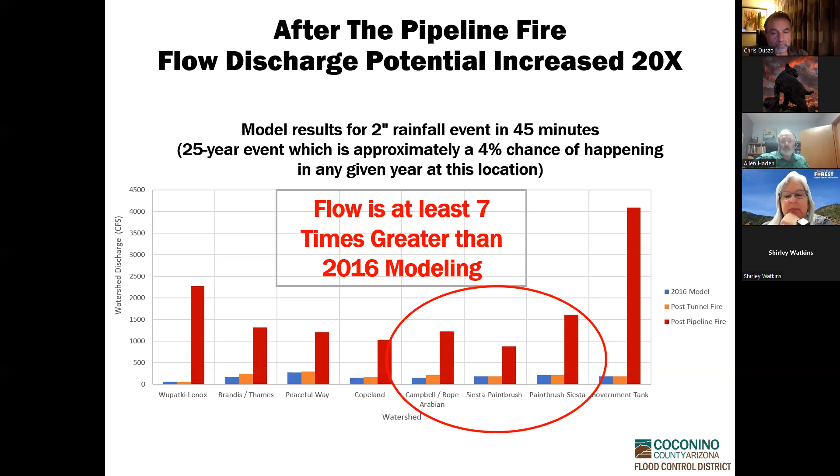So the district undertook to produce, we set a goal early on to produce 1 million sandbags, and we did reach that goal. Fortunately, we have a stockpile in place for next year now.

We placed over 4 miles of concrete barrier. The engineers worked around the clock preparing the mitigation exhibits, and the fires had actually damaged a number of the measures on forest, which had to be repaired and prepared for the flooding. A number of other things were done to clear out channels and those types of things.

We did secure some funding through NRCS Emergency Watershed Protection Exigency, which means emergency funding, specifically for barriers and sandbags. We've probably spent in excess of double that, though, on those measures. But some money is better than no money, that's for sure. So we really appreciate their support of those efforts.

It's pretty likely that the district will spend upwards of more than $7 million just in response and short-term mitigation from this summer.

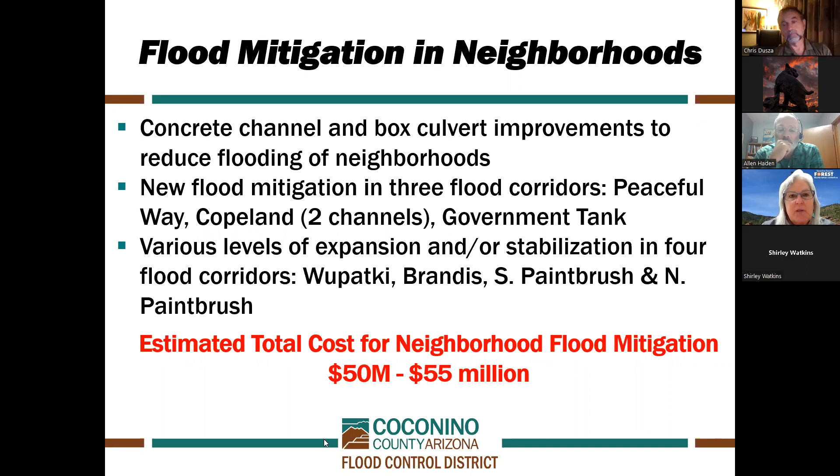Next slide, please. And then the third piece, highway drainage improvements. We actually met today with Federal Highways. Some of you may remember we sought and received about $6.5 million to construct the Copeland Detention Facility during Schultz, and we're seeking that same type of funding. It's called emergency relief funding through the Department of Transportation, to hopefully effectuate other improvements needed both to mitigate impacts to the highway and to accommodate increases in capacity needed based on the improvements we want to make and the level of flooding taking place right now. Whether we'll be successful in securing all that funding or not, who knows, but we had a great meeting today outlining the needs, and ADOT is moving forward to bring on an engineer to begin engineering some of these measures. Some things they've already agreed to move forward with, and some still require additional discussion. That total is in the ballpark of $45 million. Next slide, please.

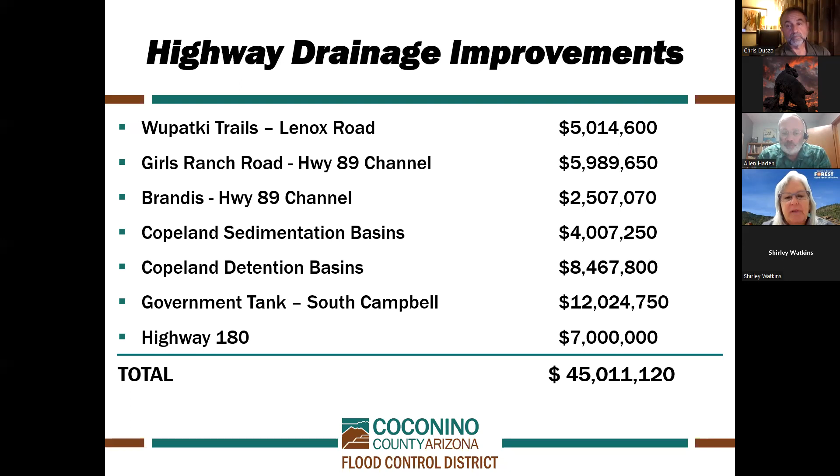This summarizes the overall mitigation costs for the entire plan. On forest, we're looking at probably upwards of 40 to possibly as high as 45 million. Flood mitigation in the neighborhoods, 50 to 55 million. Highway likely in the $45 million range. So a total price tag of 130 to 145 million. The county has probably never spent that amount of money in its entire history. Certainly Schultz was the last largest project in the county's history, and that was, like I said, over about 5 years. I think we spent upwards of 40 to 50 million total with various funding sources, largely NRCS Emergency Watershed Protection funding. Unfortunately, in 2016 a decision was made that funding could no longer be used for on-forest measures, so now it can only fund measures on private property or within public right-of-ways. So we're having to identify other funding sources through the Forest Service for those measures now.

Next slide, please. Just want to reemphasize that the magnitude of funding we're requesting, largely through the federal government as well as the state, is obviously significant. We must have an ultimate plan, and we must match the funding, right? None of these projects can be funded in entirety by the state or feds, so the district will have to match that, and there will be some level of limitation to that ability to match. Right now our full focus is on working with our congressional delegation to try to get the appropriations needed, both for the Emergency Watershed Protection Program and for various programs within the Forest Service. They largely have a disaster relief funding mechanism as well, which I just learned about today, and they're seeking funding. Again, we're working at the federal, regional, and forest level on those efforts.

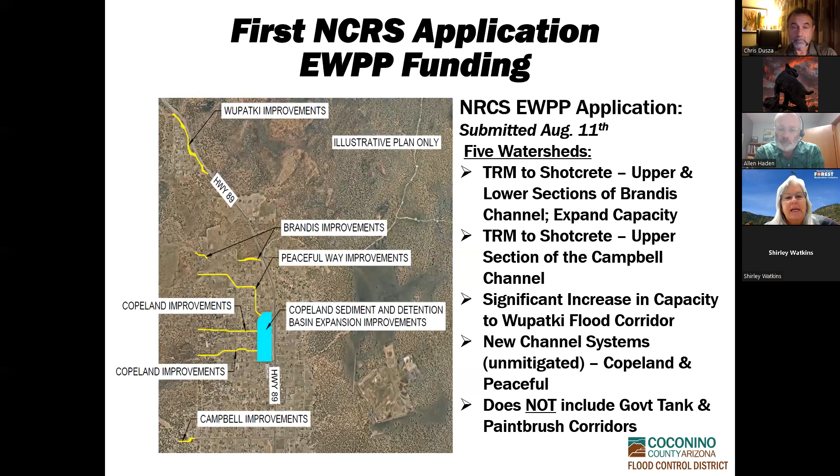It does include converting the upper section of the Campbell Channel from TRM to Shotcrete, providing some additional expansion in capacity. It did not, though, include the government tank and paintbrush corridors. I'll move on to that next. Go to the next slide, please. This is what was included in the original application.

And this project has been placed on the project wait list. Next slide, please.

We're in the process of submitting right now. We're working with Arizona NRCS staff to submit an application for the government tank flood corridor. Approximate cost is about 26 million for that. It's a very complicated and complex corridor, and we hope to have that finalized and sent off to DC this week, that's our goal.

We've submitted it and we're working back and forth with them on what's eligible and ineligible. We're also preparing a third NRCS application for the paintbrush flood corridors, and also to construct, across the entire flood area, some level of individual lot mitigation where needed. We're going through a process now to identify properties that we think, post mitigation, would still be at risk for some level of flooding. For that third application, I'll be submitting the letter of intent this week, then we work through a process with them to ultimately submit that application. You'll hear more from Chris Dusza in terms of what would be included, in terms of the measures and enhancements to the existing mitigation within the paintbrush corridors.

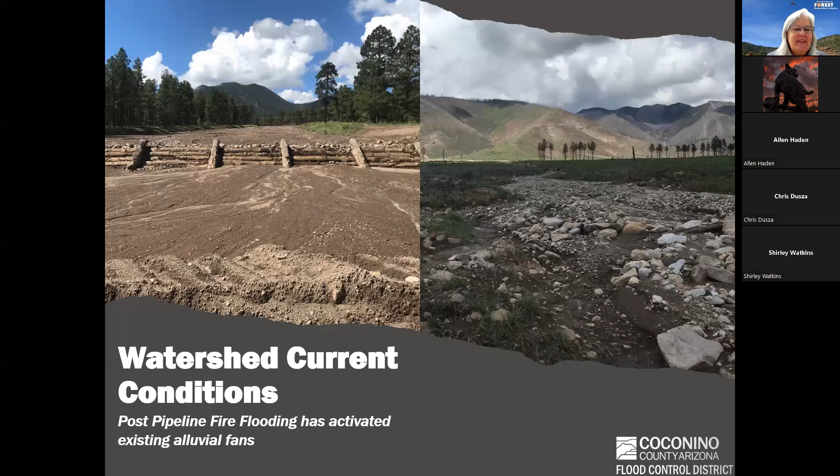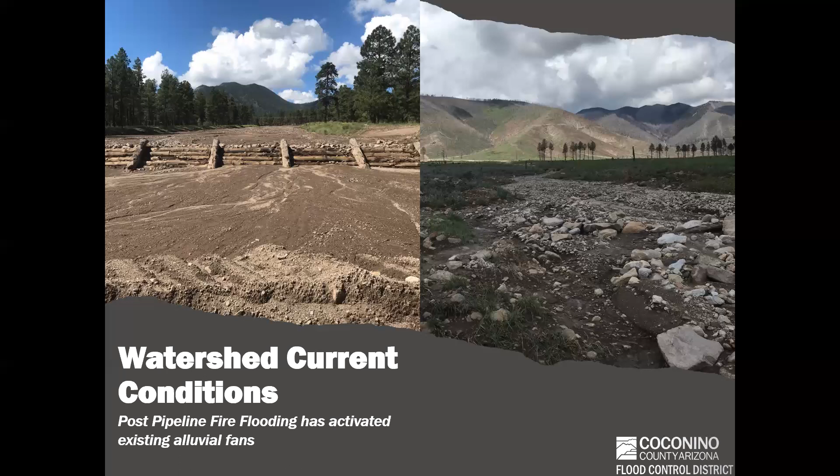So anyway, a little bit about the watershed conditions. If you didn't hear that, the huge amount of flow after the pipeline fire has reactivated the existing alluvial fans and reactivated the channels. There's been a lot of activity up high in the watershed, lots of gullying coming across the Waterline Road and across the 420 road, building and rebuilding fans, and then moving sediment down the hill. And you guys have seen the result of that down in the neighborhoods. So we can go on to the next slide.

So again, this is kind of what it looks like here. We get big cuts off the really steep portions. It comes out onto alluvial fan surfaces above the 420 road. The one on the left is the South Paintbrush fan above the 420. Spreads out, does its work, recollects itself, and then cuts back through some of that piled up sediment and carries it further down, creates another fan.

And so these fans build and then cut and then build and cut, marching themselves down until the constructed fans, which are right above the neighborhood. And those fan surfaces in the neighborhoods, right above the neighborhoods, have remained for the most part intact and have done their job really well. We are seeing them collect 85 to 95% of the sediment that goes across them, just as they were intended to do.

But we can go to the next slide.

And that's caused quite a bit of aggradation on those, quite a bit of aggradation in the terminal trenches, which serve to collect that widespread water and put it into a transition channel and get it down into the conveyances through the neighborhood. Those transition channels have been overwhelmed by this huge increase in flow as well. So the flows that are in excess of the design flows have gone back onto the existing fan surfaces and spread out where they were intended for flows beyond the design flow.

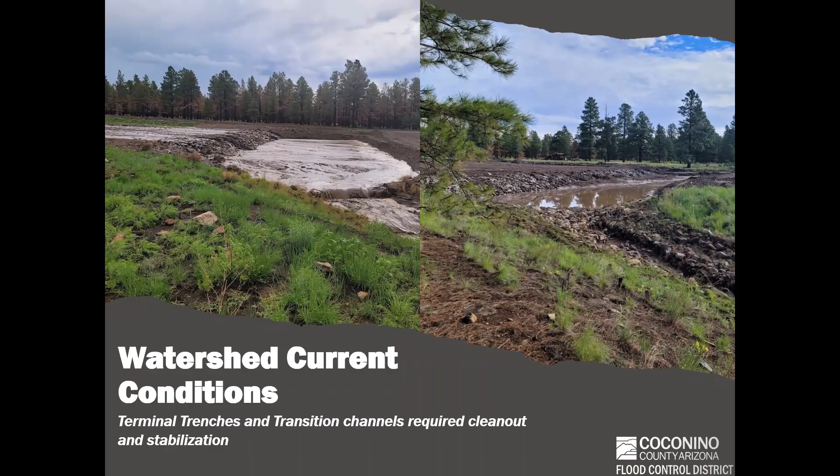I'll go on to the next slide. So for long-term mitigation that we're considering, if we can find funding for it, this is kind of what Lucinda showed you, the overall idea of 9 different watersheds and how we're going to work in those watersheds.

And then that means working on the 420 road crossings, which all tend to concentrate flows rather than spread them out. And so we need to make sure that they don't become the head cuts.

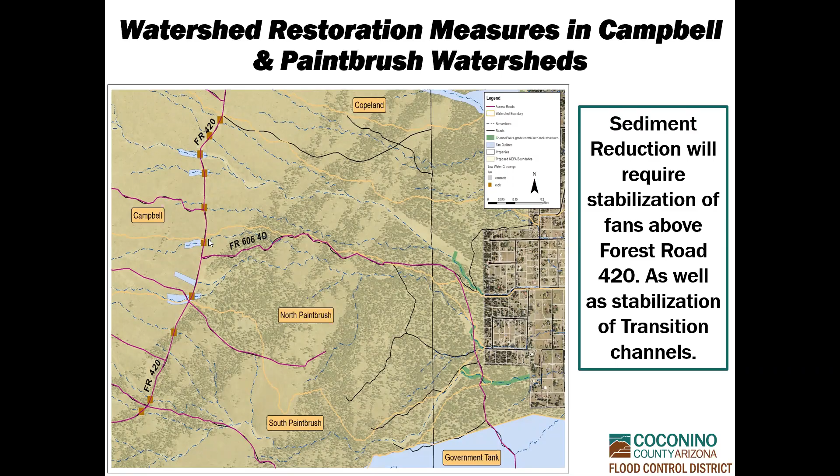So we can go on to the next slide. Just to remind everybody, the goal of this on-forest watershed restoration is a reduction in sediment source and sediment transport, and we do that through the restoration of channels and alluvial fans.

The reason that we need to keep the sediment down to a dull roar is because all the pipes, all the channels through the neighborhoods operate on the basis of being relatively free of sediment. When you have this huge amount come down, it clogs up all the channels, and it's caught, and then they work and spread flows everywhere and cause a big issue.

So far this summer, we've had things on the forest that worked pretty well, but we've got to up our game, especially on the upper portion of the watershed. That will mean restoration of alluvial fans and restoration of channels.

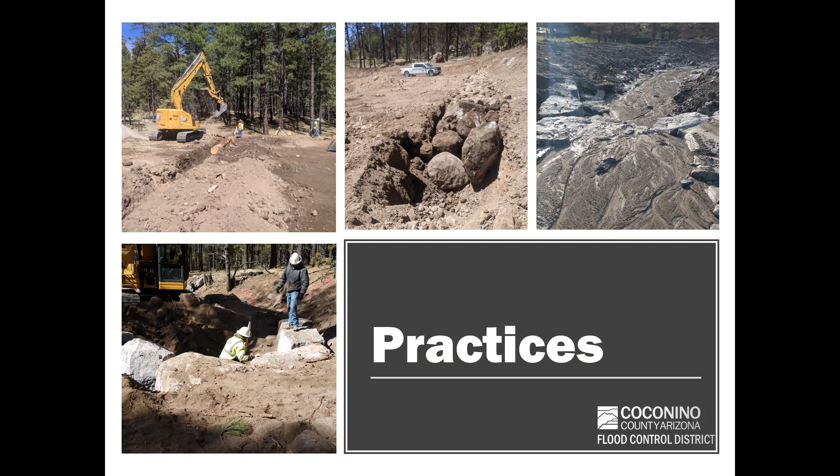These are the same practices we utilized for the Schultz restoration work, and they've worked really well. We just need to build them bigger and build more of them in different places right now, given the new flooding regime.

Again, alluvial fan restoration—building sills to keep it from eroding, and then revegetation. This is from Museum Fire, Spruce Avenue Wash, just completed this summer, and it's worked really well through the course of the summer.

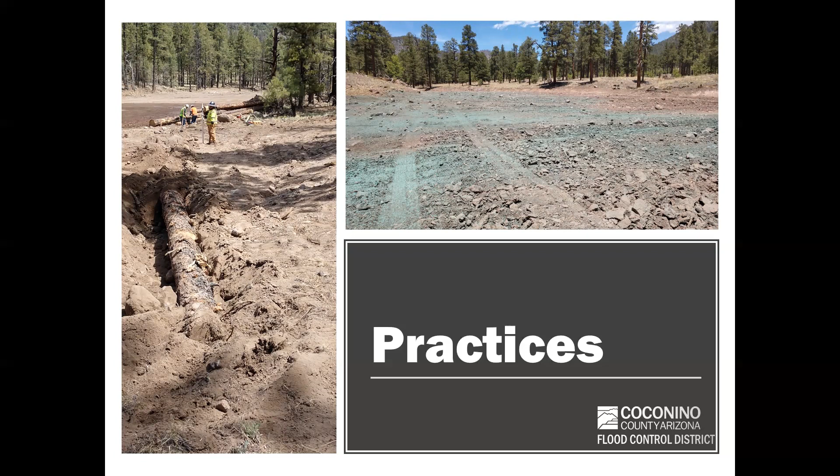This is a hydroseeding operation. We come back in and reseed the area with native seed to hold the soils together and provide some long-term resistance to erosion.

For those of you who have been around since the Schultz activities, you know what these construction activities look like. It takes large equipment—excavators, bulldozers, lots of trucks and yellow machinery—running around on the fan surfaces to get them even, install the grade control, and do that work.

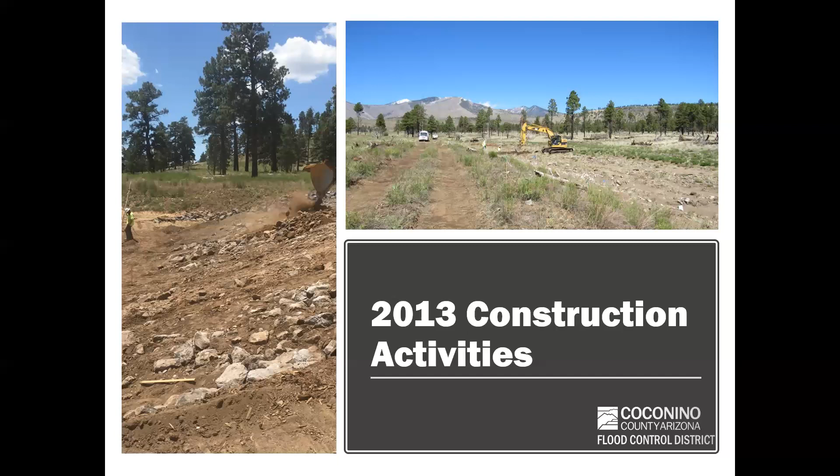It can take a month or two to put some of these watersheds back together, but it's well worth the effort when we can get it to go right.

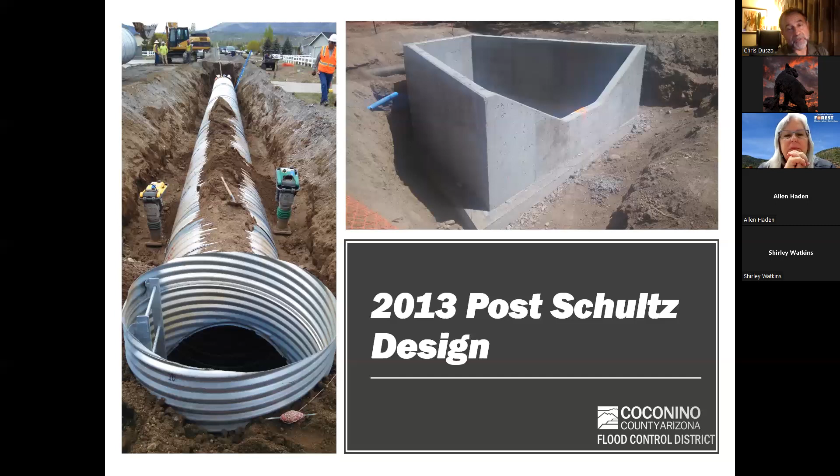Next slide, please. So a little bit about

2022 and the post-pipeline fire, or more accurately post-pipeline and post-tunnel fire. These watersheds were burned again in the pipeline and tunnel fires. Who would have thought 10 years later we would be back at the same place we were after Schultz with these watersheds. We had quite a bit of recovery that occurred after Schultz, up until these fires. As Lucinda mentioned, things on the forest and through the neighborhood were really functioning very well until these fires occurred this year.

As Lucinda said, as you saw in the various graphics, we've seen a tremendous increase in the amount of sediment, debris, and stormwater runoff coming out of these watersheds as a result of the fires. In these watersheds, we modeled a 2-inch, 45-minute storm, about a 25-year recurrence interval, and that didn't account for any watershed recovery. So we're really looking at these watersheds in an immediate post-burn situation. The discharge coming out of the Campbell watershed is about 1,200 CFS for this event, and in both North and South Paintbrush it's roughly 900 CFS. So considerably higher than those original design discharges we saw in the post-Schultz era.

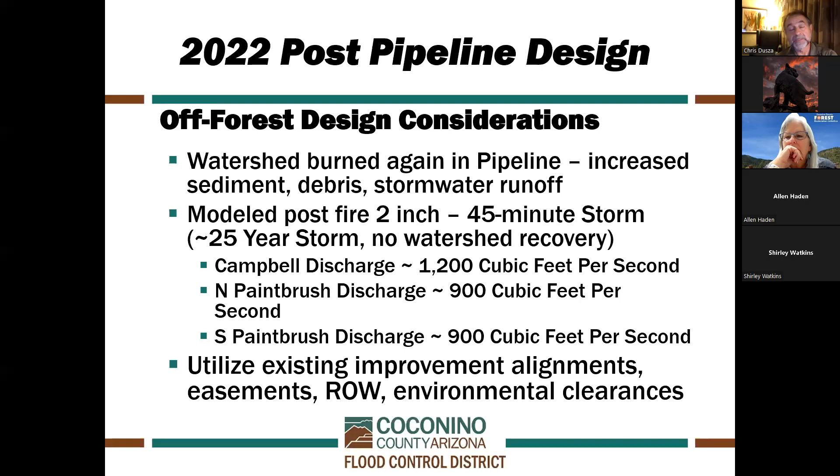A goal in these corridors, in Paintbrush and for Campbell, is to stabilize those damaged portions of the Schultz corridor improvements. We've seen damage in the upper part of the Campbell channel where the turf reinforcement mat between the shotcrete sections has been severely damaged by these flows, and we'll look to expand and stabilize that. You've also seen damage to the turf reinforcement mat in various places in the Paintbrush corridors. A lot of the areas where that mat has been damaged is where the revegetation didn't take very well, and we've seen failure and significant erosion in that channel.

So again, we want to look at the infrastructure we have in place and look at opportunities where we can increase capacity where it's feasible. We'll have to meet the criteria of a positive cost-benefit ratio, which shouldn't be a problem in these corridors, and we'll have to take a look at the no-adverse-impacts modeling done by that independent team. But using the existing alignments and infrastructure, I don't anticipate we'll have a problem with that either.

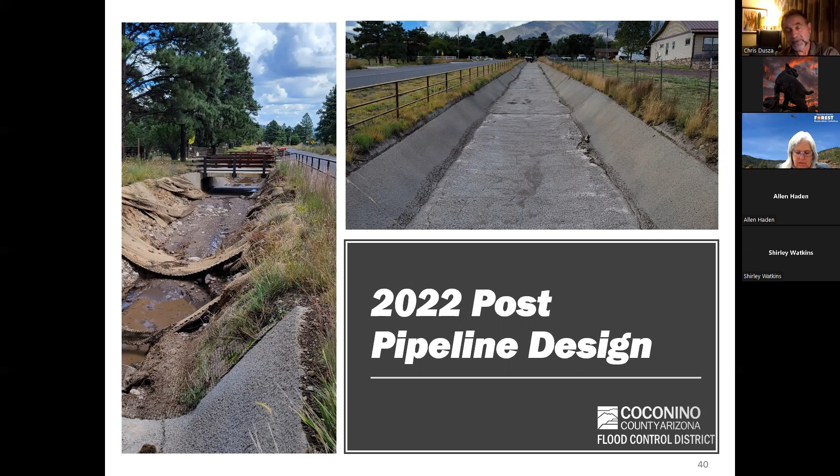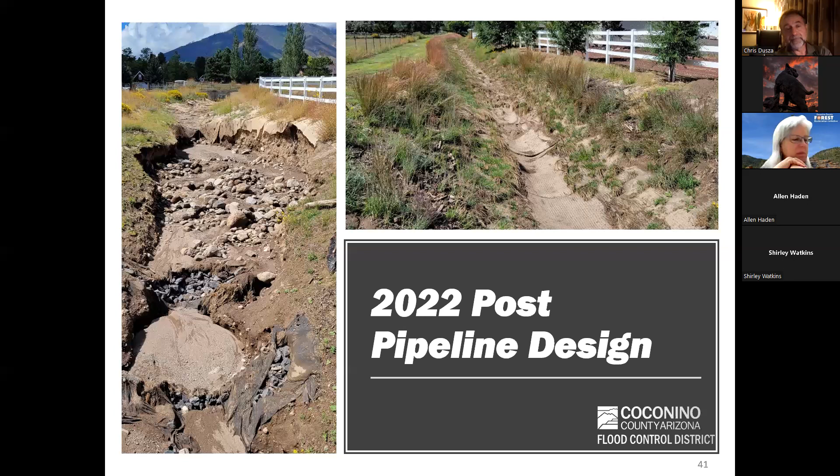Next slide, please. And so with that, I'll turn it back over to Lucinda.

All right, thank you, Chris. Again, really appreciate the team that we have, and Chris is looking at what are the options in terms of expansion of that system, and what would be involved, both on the Paintbrush corridors as well as at Campbell. And then simultaneously, Allen would be looking at how to upsize some of the transition channels and the terminal trenches as well to accommodate more water.

So we'll continue to put effort to that, at least to some degree, until we get federal funding and hopefully can secure that funding and move forward. Again, that's key to all of this—getting the congressional action to fund EWPP and the on-forest measures. The federal highways program is actually funded; it's more of a discussion of what's going to be eligible under that program, and if it's not eligible under emergency relief, then what other programs. There are some other potential funding options through Department of Transportation, but unfortunately they're much slower to access and very competitive.